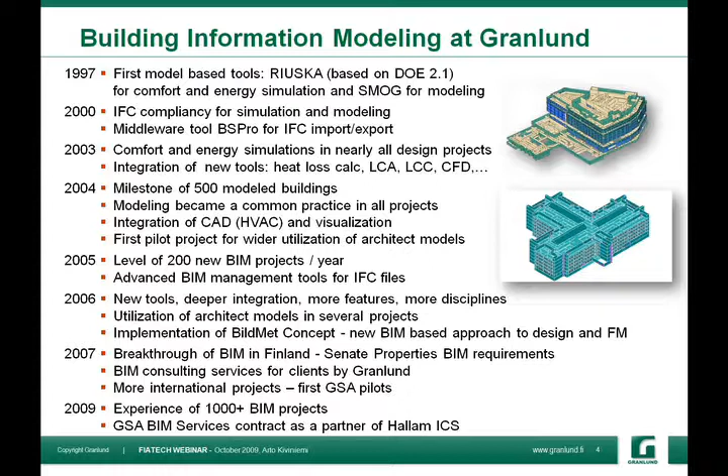So about BIM, and what I would like to emphasize here is really the integrated BIM. Because building information modeling can be used also internally. So if an architect office starts to use building information models but not sharing them, they can of course claim that they are using BIM. But my definition for the use of BIM is that it should be also shared information. I took the definition of what building information modeling means from the National BIM Standard website from the United States. There are of course several different definitions of what we mean by BIM.

But the main thing there is that BIM is really enabling collaboration between different stakeholders so that we can share the information in a digital format that can be directly utilized for different activities during the life cycle of the building. So it's starting from the client requirements collection, then through design, construction phases, and continues through the facility management until the demolition of the building.

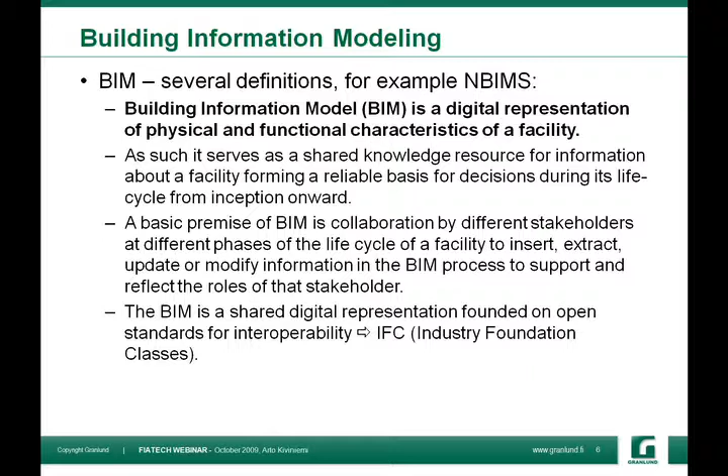So the information should have the same life cycle as the product, or actually a little bit longer because it starts before we have the buildings where we are using the building information modeling. The important part of this sharing is, of course, having the same language among the different participants. And in the building industry, that shared language between the different software products is called IFC, Industry Foundation Classes, which is now supported by all the major software which is used in our industries.

And if I think about what is specific to the architectural engineering, construction, owning and operating, the real estate and construction cluster, as we call it in Finland, is that our industry is very much based on projects, and that's one of our strengths. We are very efficient in starting new projects, and in general we know quite well what is expected from us when we join a project, what we should do, when we should do that, what are our responsibilities. And also we have traditionally had very good formal language for communication between experts, so that we have classification systems and very formalized drawings.

But of course, these also include some negative effects. This specialized representation is very difficult for the non-professionals to understand. So our clients, customers don't really understand well what we are presenting them in our drawings and specifications. And also the drawing or document-based system is bad in the sense that we have to replicate the same objects in the different documents. We have them in the plan drawings, sections, elevations, specifications. So it's very difficult to manage the information in a consistent way because we have so many instances of the same thing in the different documents.

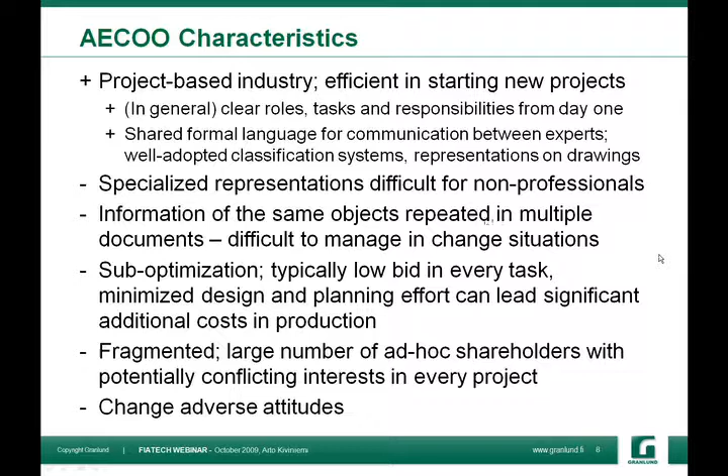And as the last point here, our industry is not very eager to change compared to, for example, the information technology industry, where the change is really inbuilt in the business model. In the construction industry, the attitude is more that we should do the things the same way as we have been doing them for a long time.

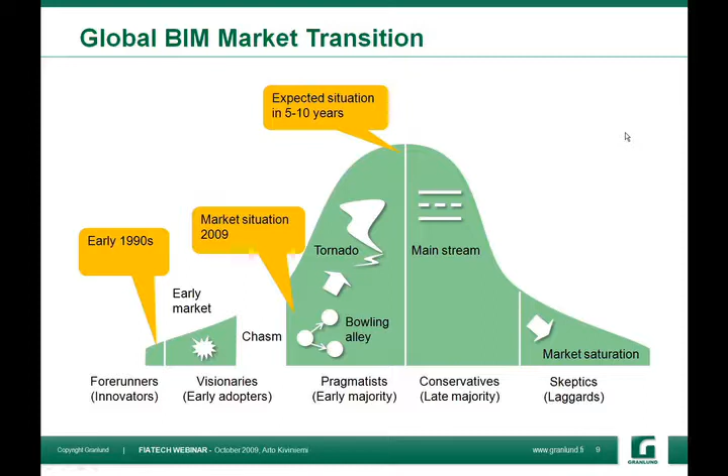How we see what's happening now in the BIM market is that there is a huge transition ongoing. We have passed the chasm, so we have really started to implement these practices into the business. We are in the bowling alley phase where we are distributing the market in a new way. So new players can find position in the market and really be part of this tornado, an expanding market in the next few years. We expect that BIM will be the mainstream working method within 5 or 10 years throughout the whole industry. At the moment, most companies are using it at some level, but not throughout the whole thing.

As Nicola mentioned, Finland is one of the globally leading countries, and there is a quite good reason for that. We have been investing quite a lot in the development of these methods already in the late 80s, but especially since 1997 when we started these big programs in Finland. I was leading the VERA program, which really was a huge effort and brought building information modeling into industry use. And many people think that investing $140 million in 10 years into the development of BIM seems to be a lot of money.

But if you compare that to the value of the construction industry in Finland, the annual construction in 2006, which was a normal year, was about $30 billion US, and the value of the buildings is $450 billion. Compared to that, $14 million per year into the development is not that huge anymore. But anyway, it has really affected the industry quite a lot.

So we have changed the way that we are working. The traditional driver has really been to avoid the information losses that we have in the traditional methods to work, which is causing a significant amount of waste or non-value-added work and errors. And also it's not supporting the decision-making process of our clients very well.

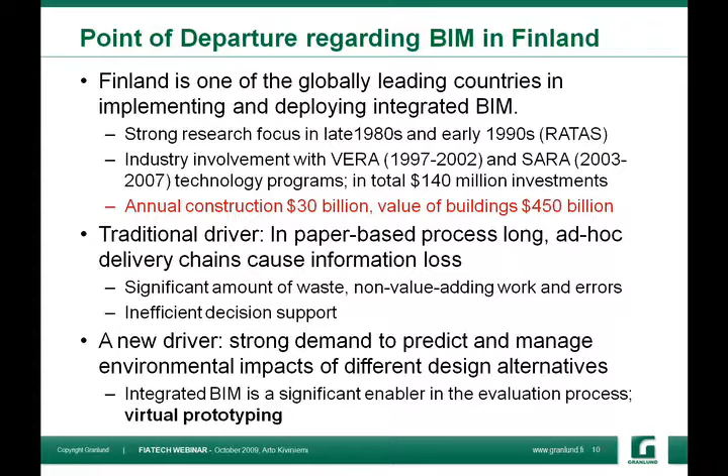We can really make very efficiently different alternative solutions, compare the energy consumption, their environmental impact, which is otherwise very, very difficult to calculate. But these tools are enabling that, and that is something that we are now doing in our own projects in a very standard manner, that every project is simulated so that we know the energy consumption of the building when it's finalized.

As mentioned, Senate Properties, our GSA, the owner of the public buildings, started to test building information modeling in Helsinki University of Technology in 2001. There is actually an excellent report from that first project. It was made by Martin Fischer and Calvin Kam from Stanford University, and it's still quite valid even though it's an 8-year-old report, but it's still telling a lot about both the potential and also about the problems that we have when we implement these things.

After that, Senate Properties has been testing a lot the use of BIM in their processes, and then in 2006 they decided that they will start to use BIM as a standard method in their own investment process. And really that standard use started from the question: what information is needed for the decision making? And then which parts of this information are already possible to process with BIM in a better way than the traditional methods? And one important part was the market readiness, do we have companies who can really provide these services for the owner.

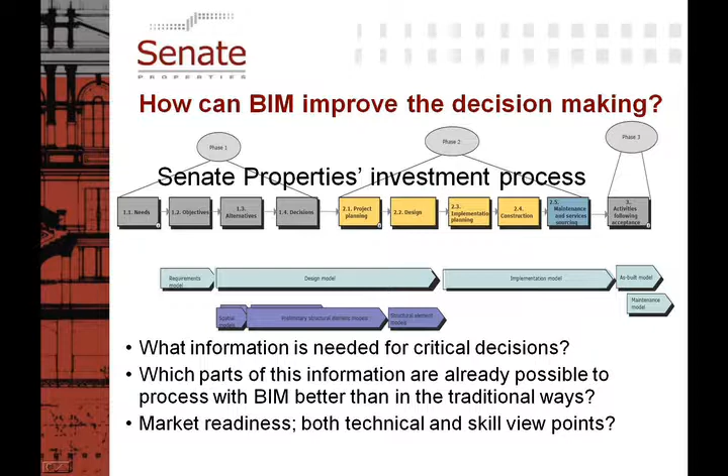And then we started to look at the process. At VTT I was responsible for the BIM guidelines for Senate Properties, and we tried to find the balance between what we want to do and what was possible to do with the technologies in 2007. And then in October 2007, Senate Properties took these BIM processes into practical use.

First, the mandatory use of BIM was only in the architectural design, but in April this year they expanded it so that now the use of building information models is mandatory in all projects throughout the whole process and covering all design domains. And they use models also for the visualizations, cost estimations, checking the scope so that the building is designed according to the program, and also energy simulations and different other types of simulations and calculations are done using the model. So it's now real practice in Finland in all the public projects that Senate Properties is owning.

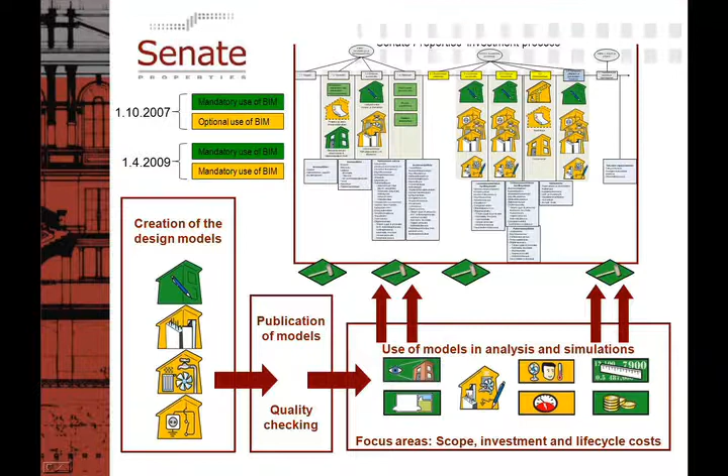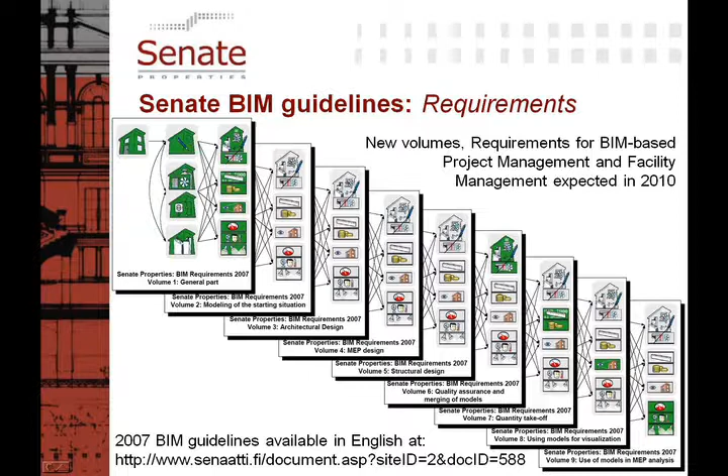And they also decided that we translated these BIM guidelines. There are 9 volumes, a general part describing the whole process, and then specifically for different design domains and different tasks. These are available also in English on the Senate Properties website, because they also decided that it's important to continue the international collaboration. We are currently starting the updating of these guidelines, so that we will have these 9 volumes updated next year, and also 2 new volumes: the requirements for BIM-based project management and another one for BIM-based facility management later next year. So it's now really starting to cover the whole life cycle.

Then if I look at the use of the building information model inside our company, really the model that we get from the architect, or in those projects where we don't get that from the architect, we do the building information model ourselves, because it's a mandatory part of our internal processes. And as you can see, we have a lot of different activities, starting from the requirements management, going through different analyses, calculations, simulations, and of course the traditional design processes.

But then we also utilize that information in the facility management and what we call the self-reporting building, which means that we are collecting information through sensors and networks from the building, comparing the behavior of the building to the simulated behavior, and when necessary making adjustments in the technical systems, so that we really know how the building is behaving and how it should behave.

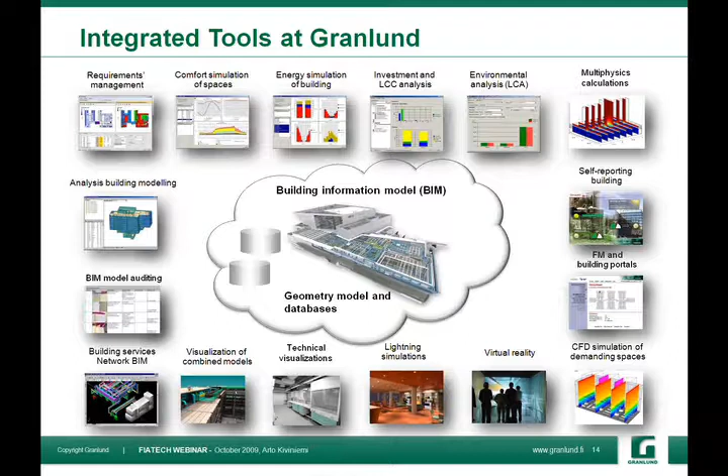Some of these tools are our own development. Some of them are commercial tools. Here you can see the names of the different software, where you have the green G, Granlund logo. That's then our own development, and then a lot of commercial tools as well.

An essential part of the development that we have been doing is with the integration platform, that we have tools that can handle that information throughout the life cycle of the building. So we have the databases, we have the interfaces between the different software products so that we can seamlessly transfer that information in the process.

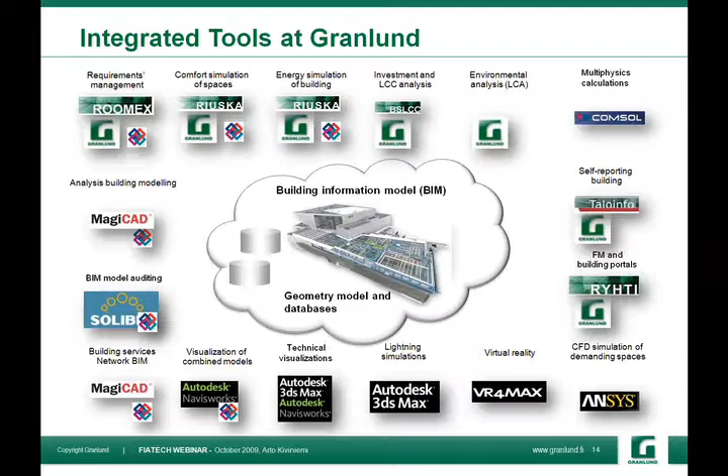Not to go into the details, but a little bit about the philosophy that we have: an essential part of the whole process, a central piece, is really the requirements management tool, which means that we are collecting the client needs in the beginning of the process, specify them in the technical requirements, bring them into the central database, where we at that point don't have any geometry, but we have the list of the spaces that are needed.

Then we get the architectural model, we map these requirements to the spatial program, check that the architectural model has all the information that we need in our processes, make the service zoning here, and then start the actual simulation, and we get the geometry and space data to the simulation software, and then the results back to the central database. Only after that starts the actual design process, where we make the system designs, HVAC, electrical, and so forth.

And there we take the simulation results as the basis for the design process, and then the design data goes back to the central database. And when the building is finalized, we get all the maintenance information, basic information for the maintenance of the building into the database, and can then report from the maintenance database to the client.

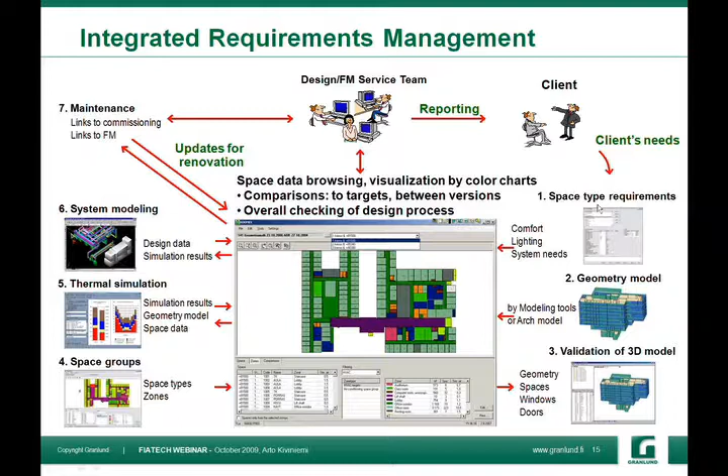So we are covering the whole life cycle, and we are also following the customer's needs, so that when we start new projects, we have the information about their existing facilities, what kind of things we have to change in the next phases.

I'll take as an example project here the Helsinki Music Center, which was a competition almost 10 years ago, but the start of the project was delayed. And when it started, the Senate Properties decided, even though this was started before the BIM requirements, that they will use the modeling in a very extensive way in this project.

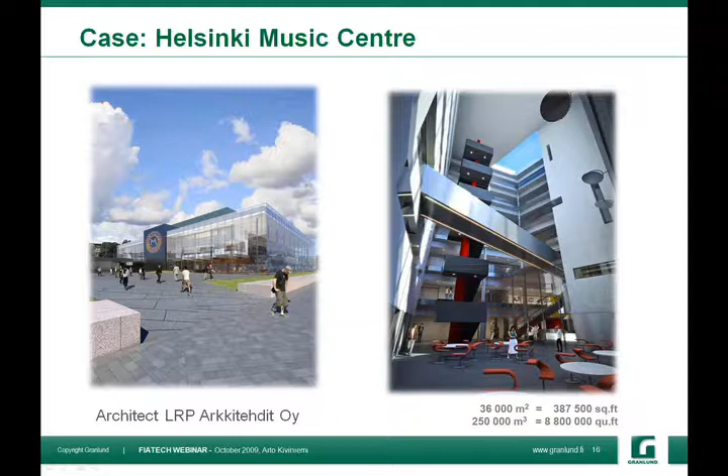As you can see, it's quite a large project, almost 9 million cubic feet is the volume, and almost 400,000 square feet is the area of that building. And it's totally modeled, all the design disciplines have been modeled, and we have been using those methods that I shortly described. So in this case, it really starts with the simulations.

We take the requirements for the different spaces, we do the energy heat loss calculations, comfort simulations, compare those, look at the environmental impacts of the early design that the architect has been doing, cost estimations, life cycle costs, and also in special spaces computational fluid dynamics to be sure that the conditions are as required. So a lot of work is done before the actual HVAC design starts. So we make sure that everything is possible to do the way that the client wants.

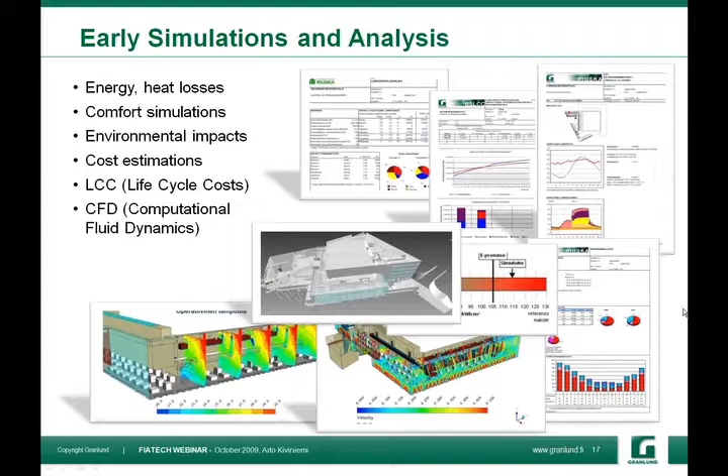Then we go to the actual network modeling, which also includes the product data. So we can automatically do in the systems that we are using the network balancing and also the sound calculations, pressure calculations, and so forth. And then we can also export that information in the IFC format so that we can combine that with the other design models and make the design coordination.

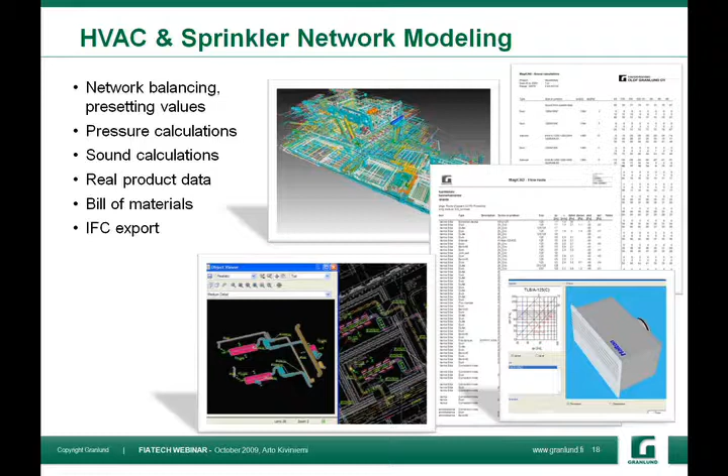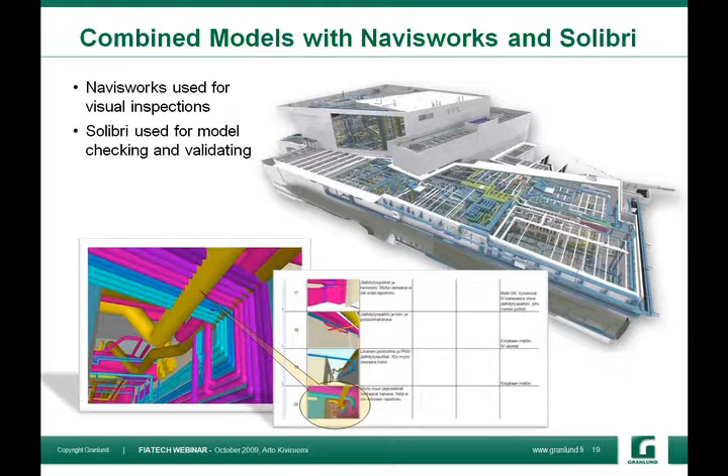For this design coordination, there are a couple of tools that we use. Navisworks from Autodesk is one of them. It's a very fast tool for visual inspections, but then we also have a more, I would say, sophisticated tool, Solibri Model Checker, that is used for content checking and validation. So it's spell checking for the model content.

So in a way, in one picture, that process that I was describing: first we get the architectural basis design, we do the analysis to make sure that everything is okay. Then we go to the system design of the structural engineer as well, and then we make sure that these models are matching together so that there are no conflicts between the design models.

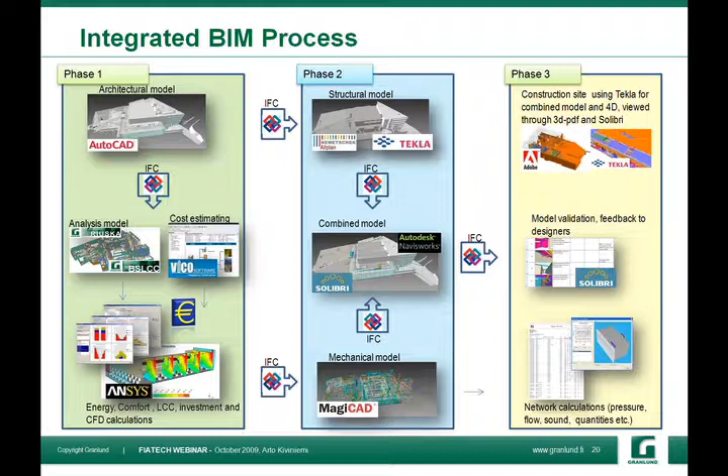And then when we go to the construction phase, the contractor gets the model and very detailed information about the products, and then of course producing the as-built model at the end of that process. And also a quite interesting part in the Finnish software development is MagiCAD, which is the system design tool we use, and Tekla Structures, which is the leading structural design application.

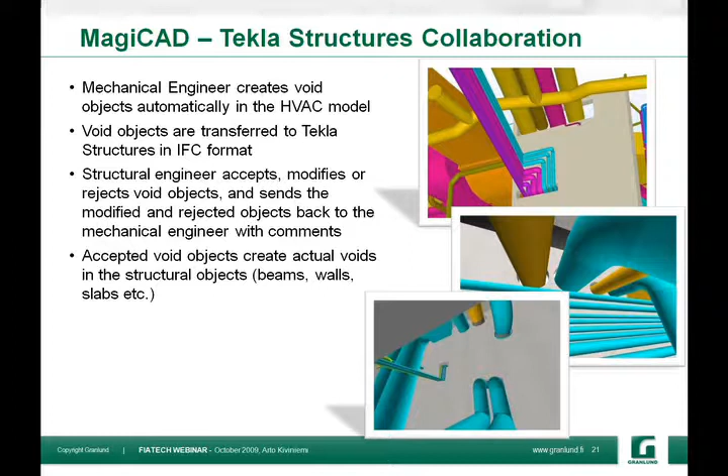They have developed a method so that we can handle the voids automatically or semi-automatically between the different design disciplines. So first the mechanical engineer creates the void objects and then sends them to the structural engineer who checks them. They can accept, modify, or reject the proposed voids. And when they are accepted, they automatically create the voids in the actual structural objects, which is solving one of the big problems that we have in complicated buildings. Because in the drafting way, it's quite complicated to make sure that everything fits together. So just an example of what we can do now.

So when I describe this process this way, it's of course easy to ask the question: is there a problem? You can do all this already, so what is there to develop and what should we do? And as we see the situation now here in Finland, we have started from the technology, and of course the technology was mandatory. Without the software that is enabling the use of building information models, you couldn't do the things that I described.

But now we have started realizing that actually there are other obstacles that we still have. We have the old working processes and also the old business models. And to be honest, also a lack of competent people. Not everybody has really been developing their skills in modeling. So what we have to change now is the way that we do business and the way that we design buildings, so that we really meet the requirements that the models are setting, and on the other hand, really get the benefits that the models can provide to the whole process. So we really have to take a very deep look at the way that our industry is working together.

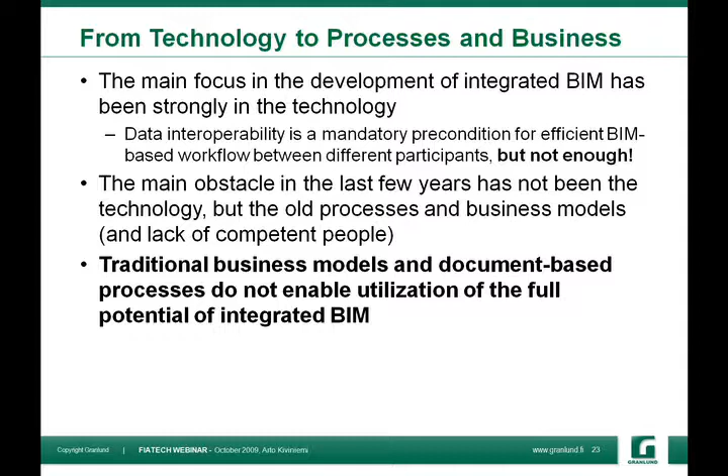So some of the obstacles that we have seen here: first of all, the required investments and the achieved benefits don't necessarily happen in the same company. So for example, the architects who are doing the first modeling are not benefiting the same way from the models as the downstream applications and the players who are receiving more information. And this is really bringing the question of who wins or who loses in this game, or is it possible that we rethink the way that we reward the participants in the projects.

And also, because we are working in such a fragmented industry, it's difficult to implement these kinds of changes which are affecting the way that all the companies are working. This is really affecting all the subcontractors, all the designers, and also the material industries, component industries. And easily we end up in the situation that people don't want to change anything because they don't really know what's going to happen. So the attitude is rather the devil we know. We struggle with the problems that are familiar to us rather than take something which is maybe bringing some unknown problems.

Also, the legal responsibilities are quite a big question at the moment, because we are using new methods, which is increasing uncertainty, and of course it's bringing the danger of litigation if something goes wrong. In Finland this is not as big a problem as, for example, in the United States, because we are working in a very small country, and people are more used to agreeing on things somehow because they know that they have to work with the same people again. But still, also here it's something that we have to solve: what are the legal responsibilities when we are delivering the models to the other participants. And then also the clients, the owners of the buildings and the users of the buildings, they don't know what to demand.

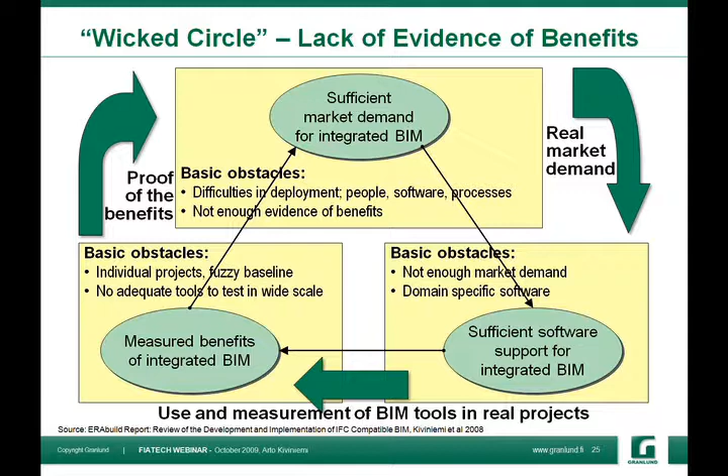I think that we have now overcome this problem in Finland, but in many countries this is still the question of "show me the money" before people really accept the change. In one project that we did about 2 years ago, we analyzed one of the Senate properties, university buildings in eastern Finland, in a very careful way.

We went through the whole process, which was based on the integrated BIM, so that we had all the participants afterwards in several workshops and sessions where we collected the information, discussions about the problems and the benefits and what was the reason for something, and then started to build the process map based on these findings.

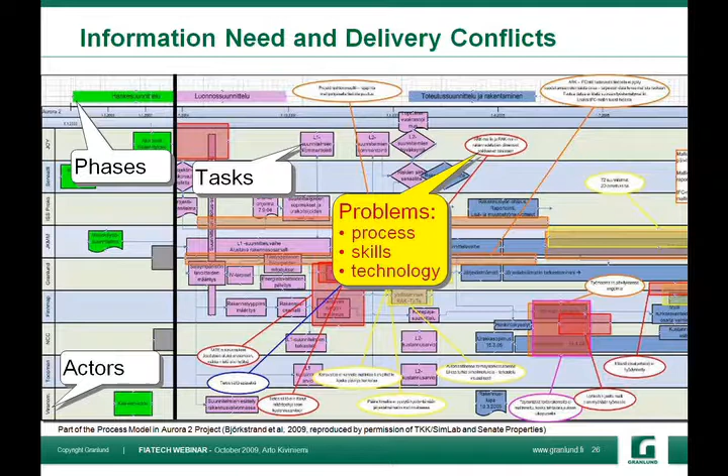And typically, one big problem is that a lot of information is produced later than it's actually needed in the process. So we are doing things with incomplete information in very many phases of the project. And this is where we have to really start remodeling the working processes: who is delivering what in the different phases of the project. And this is a big issue in the future.

So far I have only been speaking about Finland, but of course this is not the only country where these things are happening. Here is a slide from California, DPR Construction, who was involved in the Camino Medical Office building, which was made with Sutter Health in California.

And this was, I think, a groundbreaking project in the United States, because it was the first so-called integrated project delivery project, where the whole team was collected from the beginning of the project, and also the rewarding system for the different participants was totally different.

And this was a real success story, because compared to the estimations when they started the project, it ended about 6 months earlier than expected, and also $9 million below the expected price. And of course, these are such huge benefits that Sutter Health is now doing all their projects using this model, and the integrated project delivery model has been spreading around the United States quite fast in the last few years.

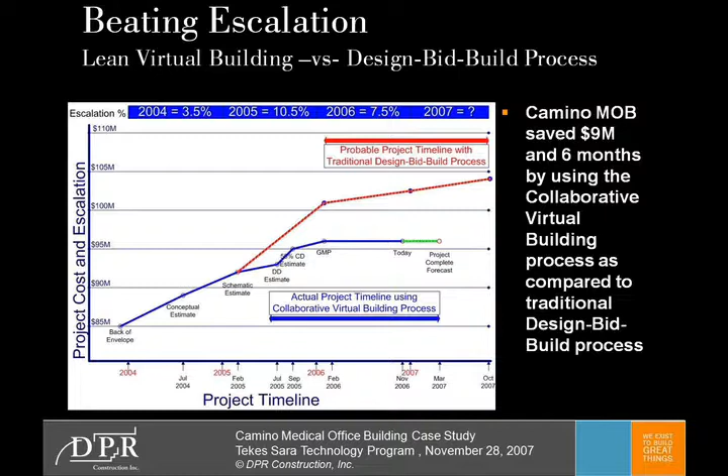And I think that this is a very good example that there are real business benefits when we are using the new technology in a new way. So really implementing a new business model, not just the new tools. And this is actually a project which we are trying to follow here in Finland. I don't think that we have been as successful in changing the business models and the work processes as DPR and Sutter Health have been in California.

And in general, how we see the situation is that when we have some new technology, whatever information communication technologies those are, usually we are progressing stepwise. First, we go to the automational change, which means that we just make the old process faster with the new tools. The traditional CAD in the late 80s, early 90s is an example of that. It was just automating the drafting process, but it didn't really change the way that we work.

Then at the moment, most of the use of the building information models is on the informational level, where we use some of the capabilities of the tools that were not available in the old way, but we are not really having that inside our business processes. And then the last step is this transformational change, where we have really changed the working processes, business processes accordingly, so that we really get the full benefits of the new tools.

And this is something which is not so easy to do, and that's why so few companies so far have been successfully implementing BIM in their processes. And this is the step which is providing the competitive advantage to the company for a long time. All the other steps are something which is actually quite easy to copy, and you can be a little bit ahead of your competition, but you can't really get long-lasting benefits by staying on those levels in the implementation of the technologies. So then, what next?

What is happening now here in Finland is that we have a totally new way to structure our research and development. We have been establishing new centers for science, technology and innovation. One of them is for the built environment. These are actually companies, so we have this RYM Ltd. now established here in Finland. 52 shareholders, meaning leading companies, universities, research institutes, are part of the shareholders in the company.

And we have now over $3 million equity capital in that company. So it was the starting capital for the company. But we have also got the agreement with the public funding organizations that they will be funding the work here. So we are aiming that we would have something between 60 to 75 million annual turnover in the next few years in this company. And this model is providing a new way to coordinate the research in Finland so that it's really meeting the targets which are important for our economy in the future.

And it means that the shareholders will define the agenda. They make the decisions about what will be developed together. And we are now preparing the first program for this company. And this is providing, I think, a really excellent way to solve this kind of complex shared problems, as for example the change of the business models and also the working processes and contractual issues. So we expect that we can take some kind of a leap in that area in the next few years.

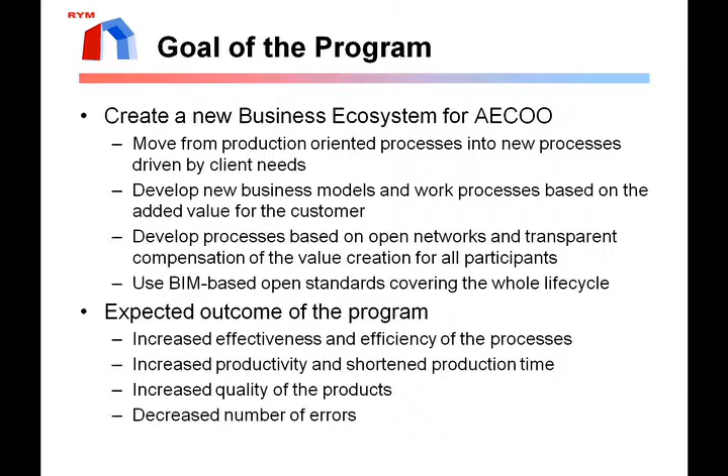So the main idea there is to build a new business ecosystem for our industry. So moving from the production-oriented processes into the processes driven by the client needs, so really a client-oriented approach to things. These, as mentioned several times, business models, working processes, and also the compensation models for the participants should be based on kind of an open book type of things. And of course, we are continuing the use of BIM based on the open standards, meaning practically IFCs. And we expect that this will then have an effect on the efficiency and productivity in our industry, and we can meet the client needs.

We had a first workshop recently where we had 4 teams, and we tried to identify different projects inside those. So work processes, logistics, supply chain management is one of those, requirement management and user-oriented production, and processes for the use and maintenance of the buildings or built environment. Also the infrastructures are included here. And then the procurement and contractual models, so how to buy these new services.

And we see that really what we try to build here is that this business ecosystem is the platform where we have the common interface for the companies, so everybody has, the same way as with the drawings, a standard interface between the companies, but then the competitiveness comes from the internal processes, so how you can utilize that information that you get from the shared platform inside your own processes.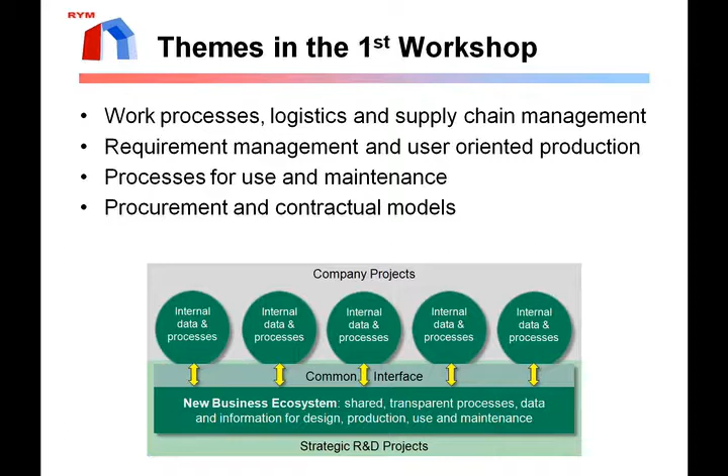That's the part that we are not sharing with our competitors, but we share this process and kind of an information platform for the systems that we are using internally. So this is the approach that we have at the moment. So a couple of slides about conclusion.

So in my opinion, the integrated BIM has created the technical foundation for the new business models and work processes. And I see that we are now in a similar situation as in the late 80s, early 90s in the mobile phone market, where the new technologies and standards created totally new opportunities for the companies, and basically they changed the way that people communicate. Of course, Nokia's success story has been encouraging us here in Finland that it's possible to really have global impact in the technology field, even though we are in a very small country.

In our industries, we see two main obstacles in the changes. One is the old work processes, which are still based on documents. We really haven't been thinking about the information flows between the project participants, and that's something that we have to do. And then also we have to change the low-bid business model so that we get the rewards based on the added value, enabling the optimization of the whole project instead of optimizing the results inside one company, which is then hurting the whole project.

And because there is a very strong connection between the internal processes and the legal and technical interfaces between the companies, we really have to look also at the legal issues here. And also this requires collaboration. It's something that none of the stakeholders, none of the companies working in this industry can do alone. But of course there are different models to drive the change.